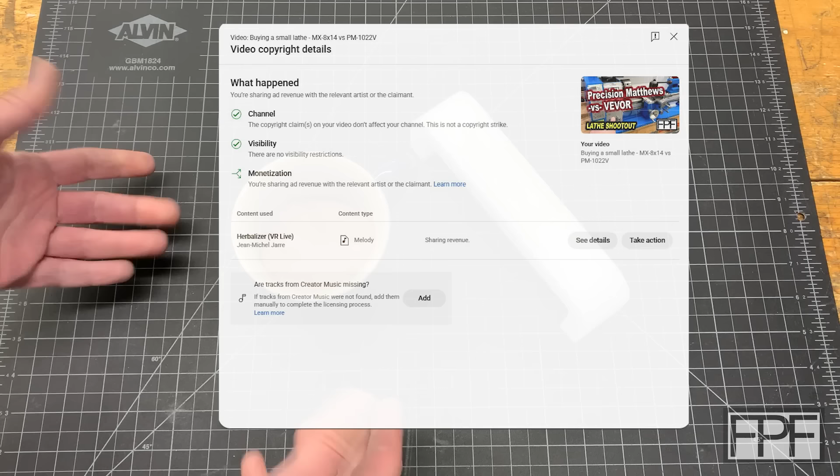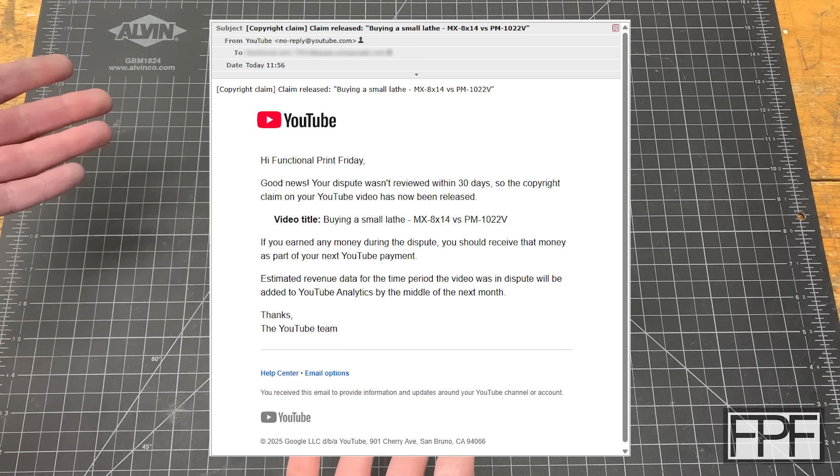But I do have an update. So just yesterday, which was actually the Thanksgiving holiday here in the United States, I got this email from YouTube that you guys have up on your screen right now, letting me know that BMG Music failed to review the dispute that I made against their copyright claim within the required 30 days. And this is great news. We have won this round.

I say this round because BMG Music could just choose to reopen the claim. Unfortunately, I don't believe there's any limit on the number of times that they can just keep making the same copyright claim against a video. I don't think they'll do that.

My original theory was that once I disputed it, they would wait the full 30 days and then just deny my dispute. And the reason companies do that and why that's so common on YouTube is because it allows them to just capture 30 days worth of revenue for that video. All of the ads that play, they get the revenue on that instead of their revenue going to the creator. So it's pretty common practice on YouTube.

I'm hoping that since they didn't deny the dispute, that maybe it went into a queue for a human to review and the bot didn't have a high enough certainty to actually bother having someone review it. I don't really know, I'm guessing, but all I know is they've let the dispute on both of the videos that they claimed copyright on pass, which means I should be getting that revenue back, which is nice.

One of the videos that they claimed it on probably didn't make more than a few dollars, but the other one's actually the second most popular video on the channel, so it probably did make some revenue. And it'd be nice to actually get that. So I just wanted to give you guys an update on that. For now, at least, it is very good news.

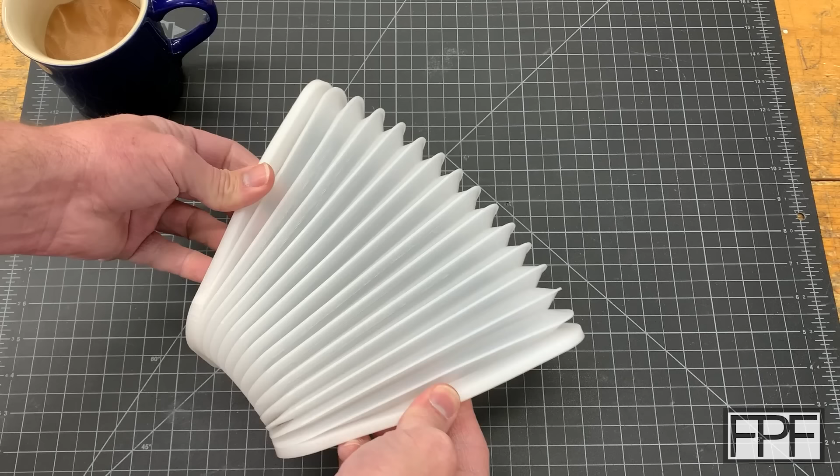All right, let's talk about what I want to actually work on this week. So here on the bench this is the test TPU bellows that we made here on the channel a while back. And I made this after coming up with the idea of printing a TPU bellows flat. And the way this is done is they're all removed now, but between each of the pleats here in the bellows on both this side and this side was just a thin piece of dissimilar material, either PLA or PETG, between the layers of TPU.

And so it prints flat, prints a little bit more expanded than this because you have those additional layers in there. And then once it's done printing, you can kind of pull this all apart, get all those layers out, and you're left with this really nice bellows structure.

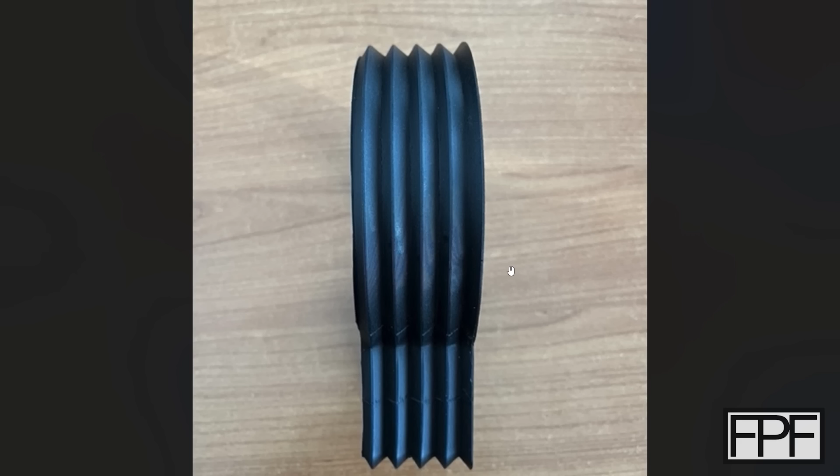I believe this is also printed in TPU, although I'm not sure. This was an attempt to make this sort of printed in its expanded state. The problem is, to print this, you end up with pretty wide layers of TPU, and this guy is just not going to compress very well. And I'm guessing, I didn't ask, but I don't think this compressed down to the 10 millimeters of total height that was required for this.

The good news is, like I said, I actually have the drawing that created this. And we do have a flat face, you can't quite see it in this picture, but I do have a flat face that we can essentially steal to start this design from. So let's head over into OnShape and I'll show you that.

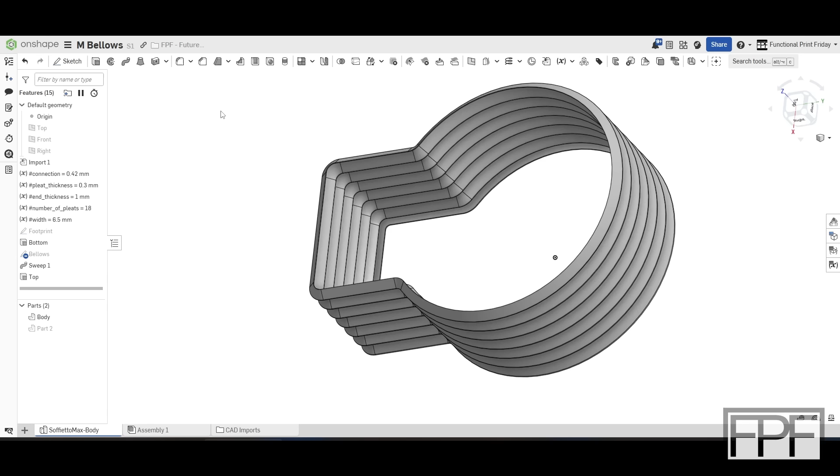All right, and here we are over in OnShape. And as I mentioned, a drawing was supplied for this, and that's actually what you're seeing on the screen since it was supplied in step format. So I started by just importing that step file into OnShape, and one end of this just sort of ends in a point. I don't know if this was the top or the bottom of the structure, but the other side has a nice flat face already.

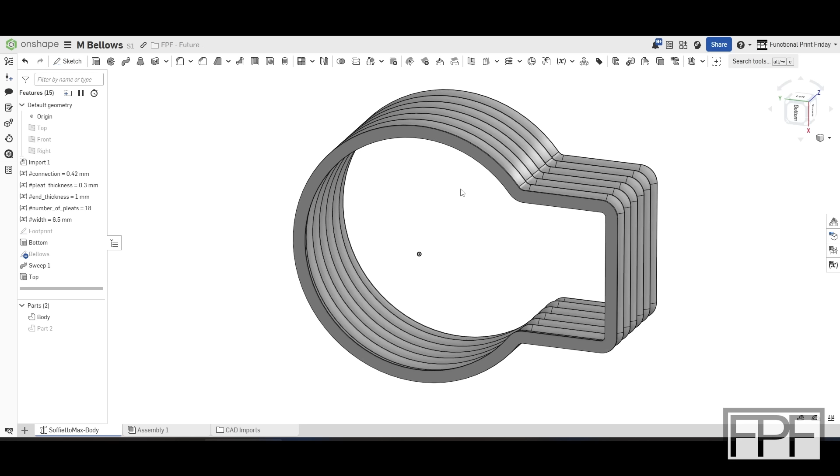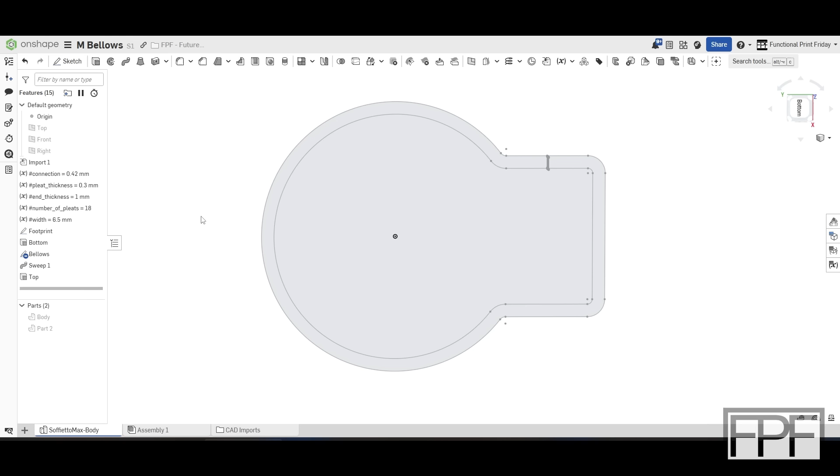So the first thing I did is actually just steal the geometry of that face to base this sketch on. So this is, I call this footprint. This is essentially the footprint, this face out here of the overall bellows structure. Next thing I did is design the bellows sketch, or the structure of the sketch itself.

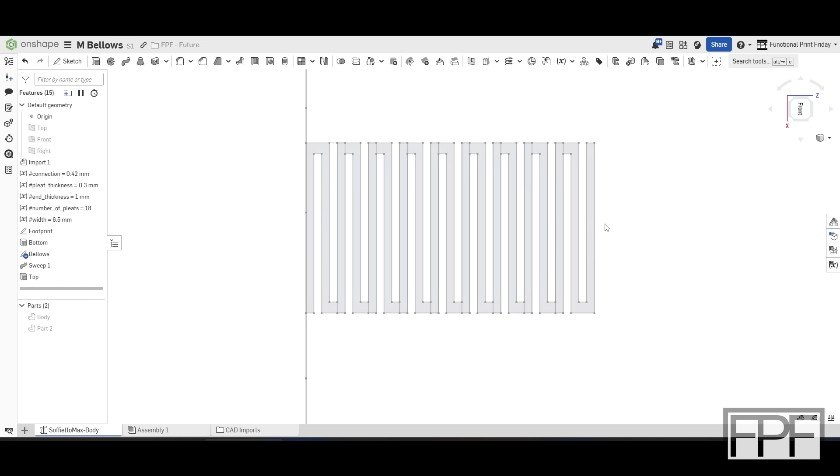There we go. So the gray section is the TPU, and the white sections between the gray sections will be our support material. So this guy is going to print as one solid stack, and then we'll expand it open and pull the support material out. So this guy is then able to open up as a normal bellows structure. And I can unhide my part here. All I did was just take that sketch and then wrap it around the other sketch of the footprint.

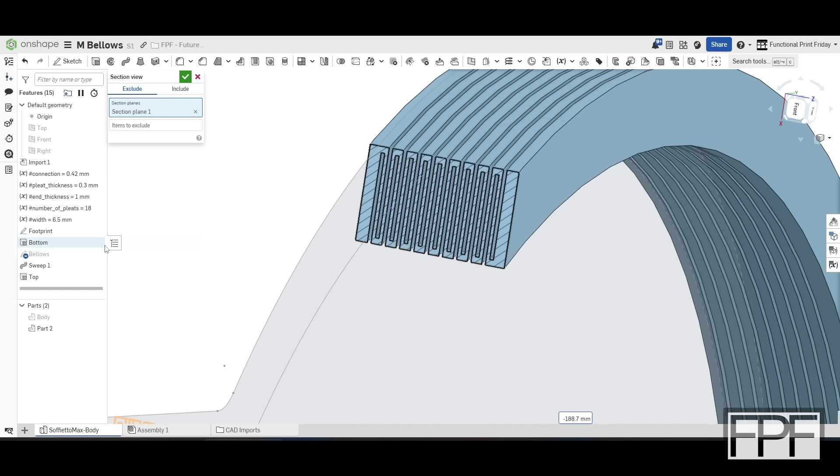And probably easier here if I just go into section view. See, we'll hide our sketch. So that makes it a little bit easier to see what is going on. It's surprisingly tricky to sketch. It's not that difficult of a geometry to look at it like this, expanded out, or in a section view like this, but it is actually a little bit tricky to sketch.

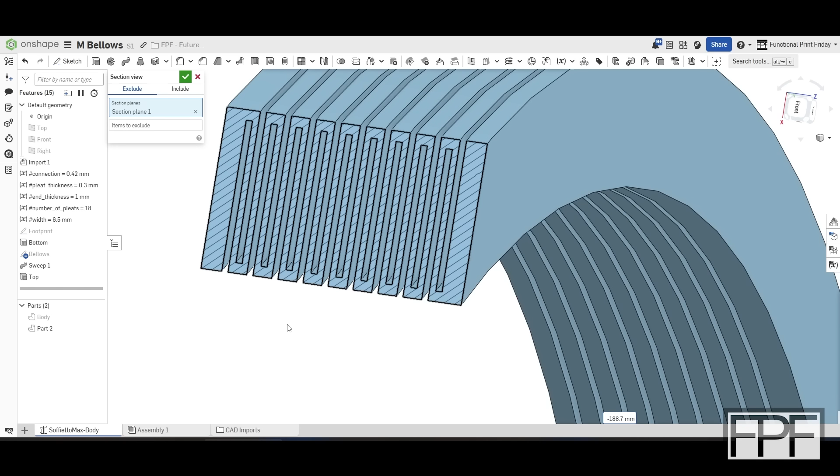And I did make it easier by putting in variables for like my pleat width, the width of the connections at the end, just to make it easier while sketching. And I have some ideas of how to potentially make this even easier as we make adjustments to this, but baby steps. I wanted to get this done, get this printing, and just see how it goes, because the width of these pleats is a lot narrower than the previous tests I've done with this method.

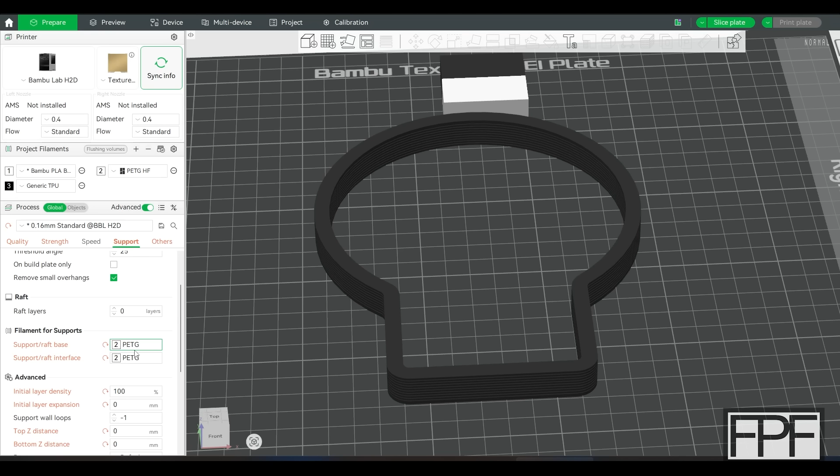So, all right, I'm gonna export this out as a step file, get this sliced up, and I'll bring you guys back. All right, we're over here in Bambu Studio. I've got this imported in, and I'm not going to spend a lot of time talking about the settings because I went into all this stuff in much more depth in the video where I originally came up with the idea for printing the bellows structure like this. But the key settings are to make sure that you have your style set to snug, and that you set both the support and the interface to whatever material is going to be your interface material.

Oftentimes you'll just set the interface to be the other material and leave your support material to be the same as whatever material you're printing from. In this case, you want to make sure that both your supports and the interface is the dissimilar material that is not going to stick to the TPU.

I used to set all these manually in here. The slicer has gotten much smarter. Since the original video I did, all you need to do is actually just make these two selections, and it'll ask you if you want to set all this stuff to the settings that are best for using a dissimilar material for supports. That all happens automatically now.

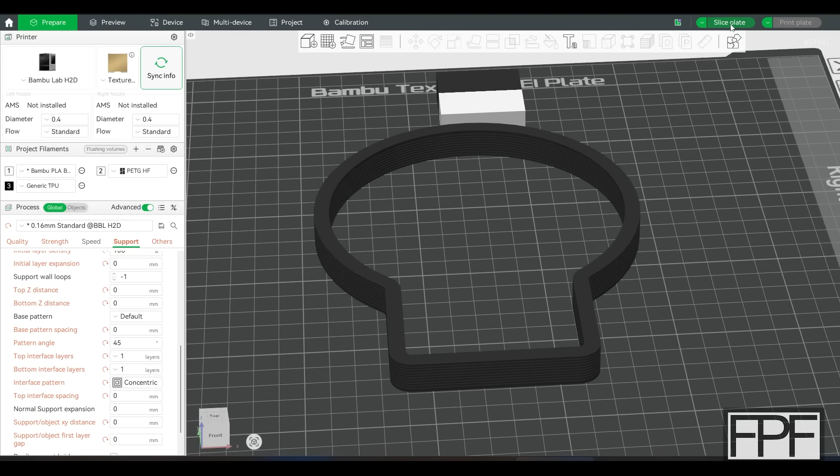The only other change I made in here was setting the interface pattern to concentric. And if I slice this up, you'll see why. On concentric, it's going to have one filament path or one line width path all the way around until it makes the full width. That's going to make this a lot easier to remove, hopefully, at least in comparison to hard corner edges.

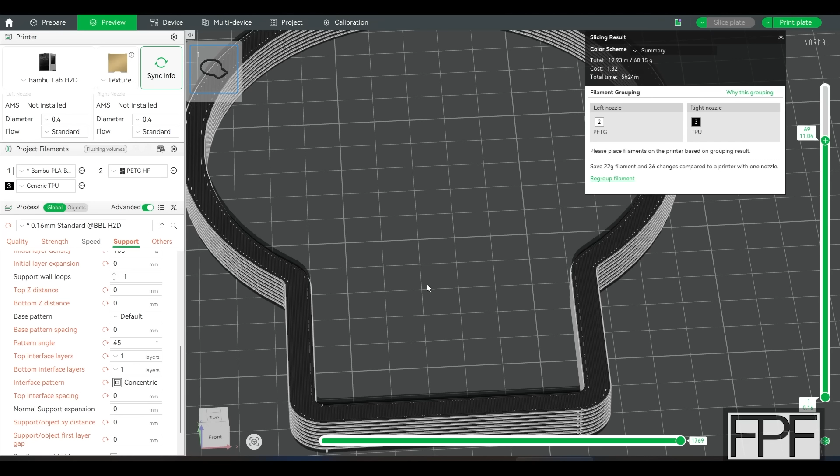Now, there's something a little bit weird going on in the slicer here. If you notice, I have the pattern set to concentric for the regular process as well. If we go over to strength: top surface pattern, bottom surface pattern, internal solid infill pattern. I have these all set to concentric, yet one of the layers, see this one here? That is not concentric. Now, if we go up another layer, it then layers a concentric path on top of that. So that's not actually what I wanted.

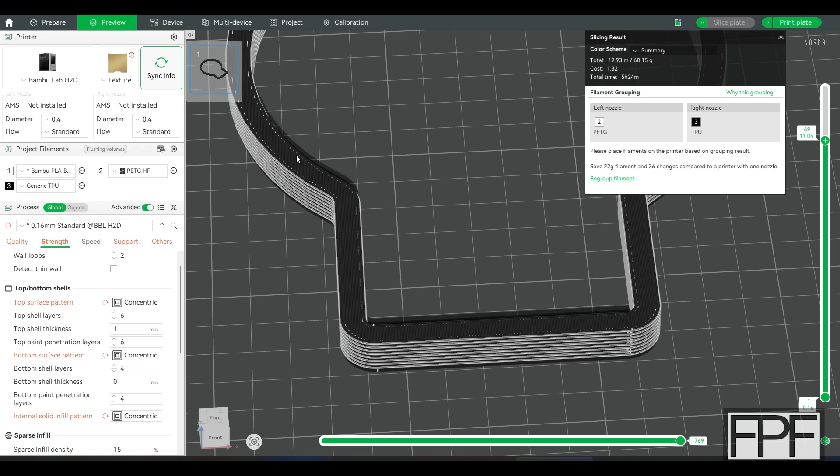But here's the thing. Since that's our TPU layer, I think we're actually going to get a lot more strength that way, assuming it doesn't have a hard time making all these short lines. Because if we did this as concentric, the second layer would stack directly on top of this. It should work fine, but it probably wouldn't be quite as strong. I guess we end up with the same exact path here, but for our section up here and down here, they're going to run the other way now. So that actually should give us more strength.

The supports, it does both layers as concentric. So I'm not sure why the difference there. If you know, let me know down in the comments, but I don't think that's going to interfere with actually being able to print this. So, all right, I'm going to slice this up. I'm going to print it. I'll bring you guys back.

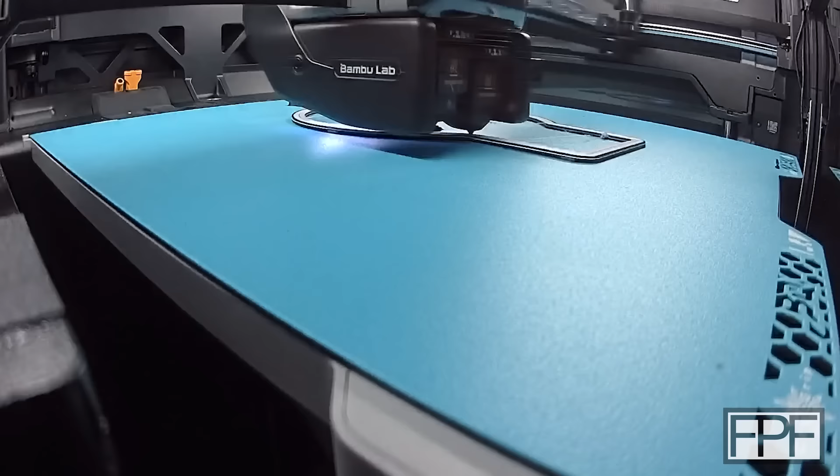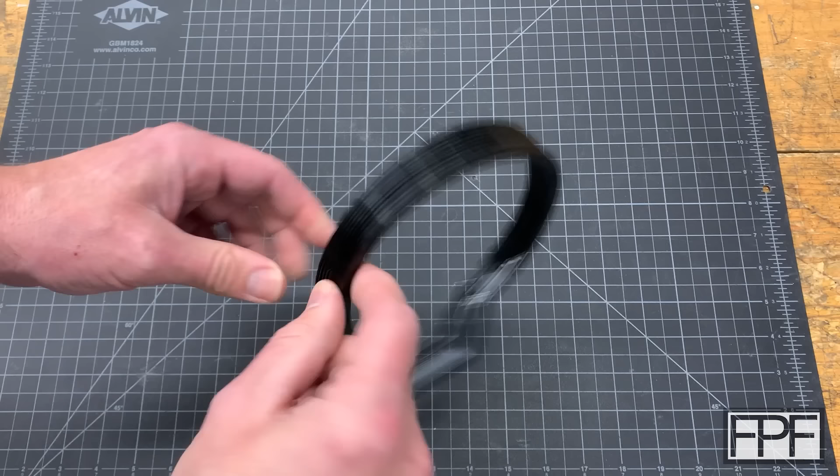All right, our first test print is complete. And I've been messing with this off camera for a while, trying to get these layers separated. They do take quite a while. I've got probably 20 minutes into this, just sitting at my desk. And unfortunately, I tore it at the back. I think if the whole thing was just circular, we might get away with just that single edge connection. I think we're going to have to go up to like 2 nozzle widths of connection, because as we get into these transitions, I think that's where it tore, right at the corner here.

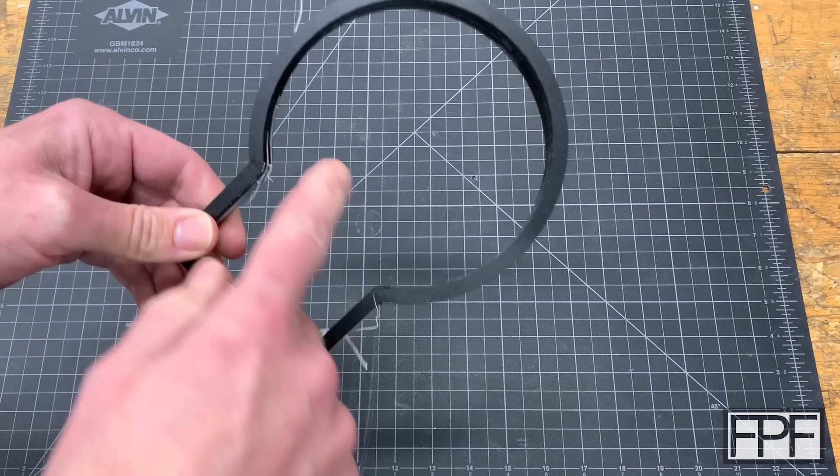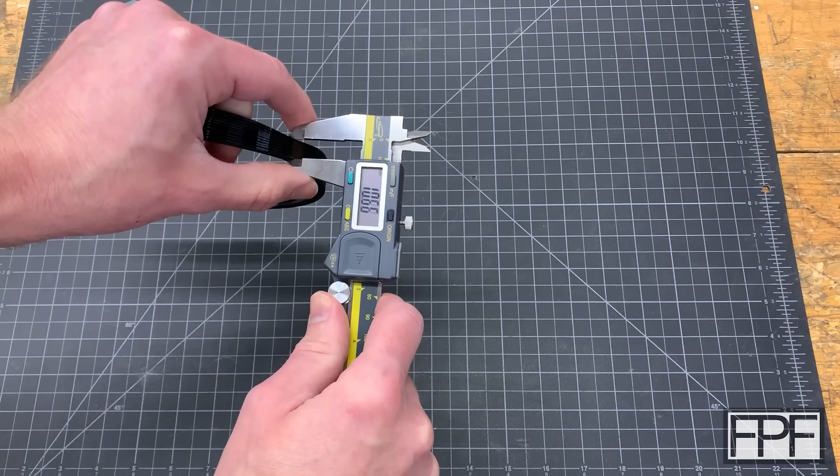Now, there was quite a bit of mess from the travel moves that crossed this, and it's possible that my TPU filament is not completely dry. I'm going to dry it again just to make sure. But I think this is still a good first test print. I think we learned a lot. Let's actually measure the width. Still over 10. I could push on this and get it down under 10, but the reality is that's over 10. So we've got a little bit of work to do there as well.

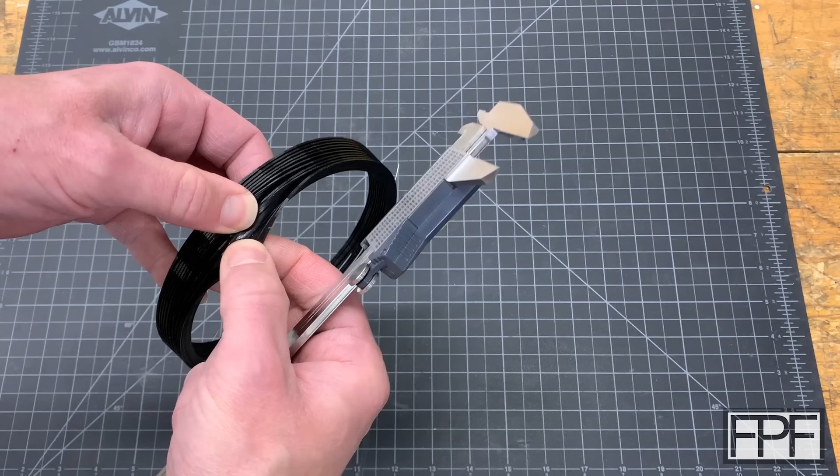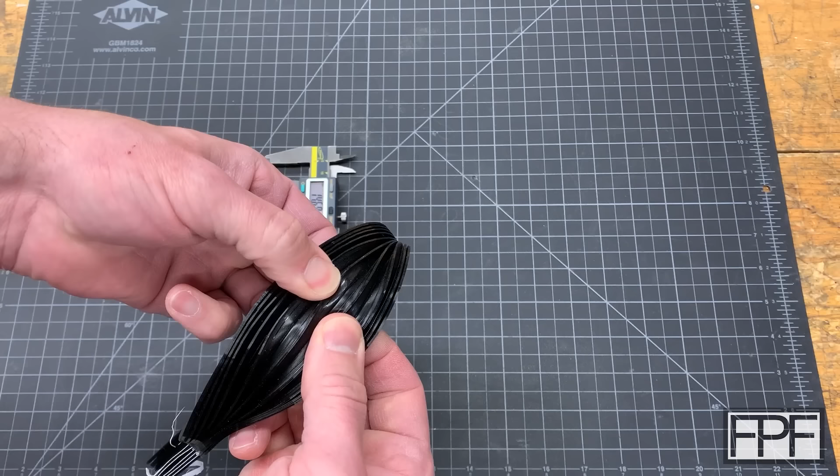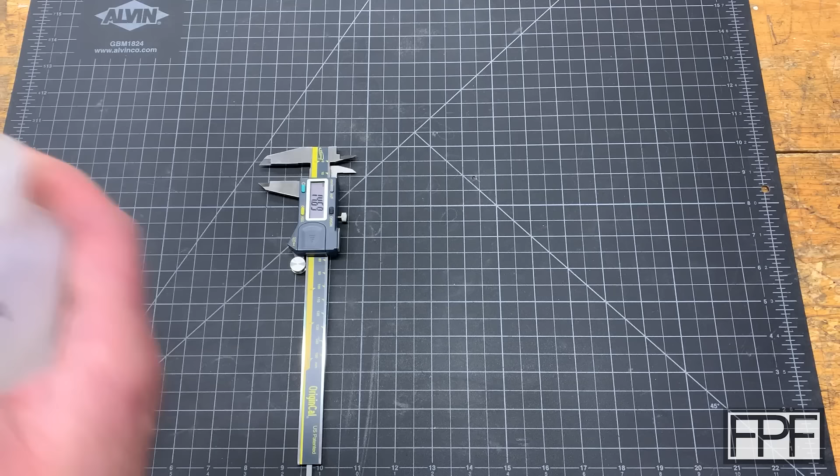I think we could probably reduce the thickness of the end pieces. But we're also going to lose a little bit in doubling the connection at the ends too, because if we think about each one of these pleats, the longer these are, the more this guy expands. So we're going to be reducing the length of each one by a little bit by doubling the width of the connection. Got to think about that. I also discovered, while trying to get this one to separate, I tried a little IPA thinking it might loosen these up, and it did seem to help.

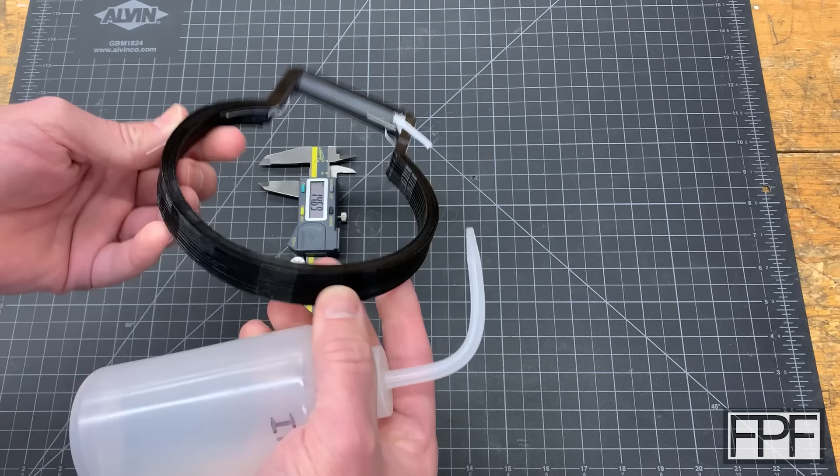So I probably made as much progress in the last 5 minutes as I did in the first 15 minutes once I started kind of squirting a little bit of IPA into the layers. So that might help us in the future.

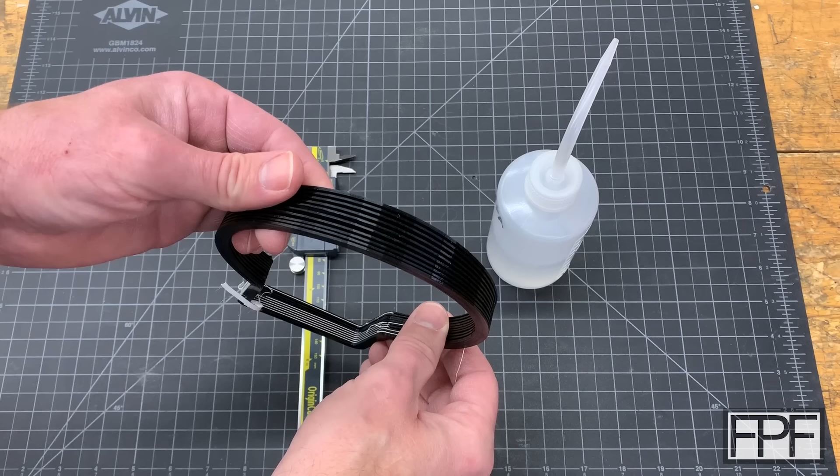The other thing I'm noticing here is, and I don't know if the camera's picking it up or not, but I can see facets all along the edge of this. Each facet is maybe about 10 millimeters or a little bit shorter in length. I can't remember if I exported this as a 3MF or a STEP. I'll have to check. We shouldn't be getting those. If I'm exporting this as a STEP and we're interpreting it in the slicer at a high enough resolution with arc fitting on, we shouldn't see any facets at all. That should look perfectly circular. So let's take a look at that as well.

All right, we got some work to do on this. I have an idea for the drawing that might make revisioning this a little bit easier. So let me go mess around with that a bit. I'll bring you guys back.

All right, we are back in Onshape, and I'm excited to share this with you guys because even though this probably looks like pretty much the same body structure of a Bellows that you guys saw in V1, the actual body of the Bellows is now built from a sweep of a completely different drawing. Rather than sketching manually the structure of the Bellows like I did originally, I've made that sketch fully parametric now, and this will automatically generate and regenerate based on that parametric sketch.

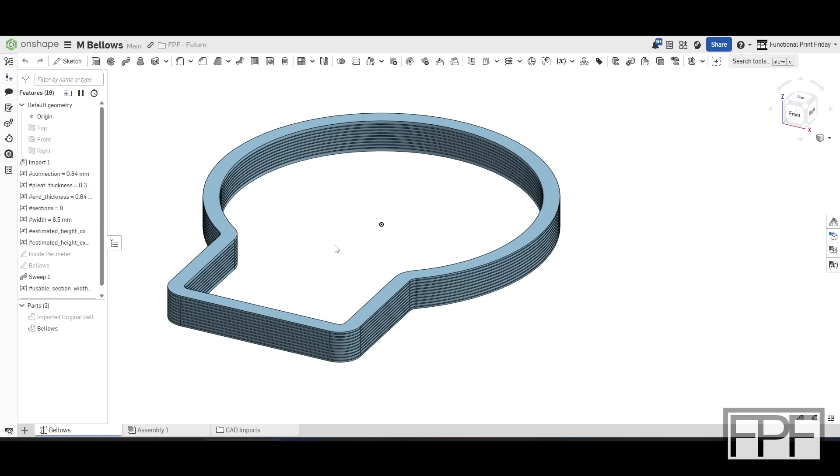So let's go into a section view. I'll show you what I mean. Let's grab one of these faces here, and we'll pull this back to where we have a nice view of the cross section of this guy. And I'm going to bring up my variables table, and we'll keep this in view so you can see what's going on. So the one change that we needed to make, and potentially the only change, was the actual connection at the end. That is the width of the point where the two pleats connect to each other.

And before it was 0.42. It was one line width with a 0.4 nozzle. So that's what our original one was based on. And you can see how thin that connection is. And I think it's probably enough if the support material between the pleats was easier to get out, but we really need the additional thickness there to make this guy hold together better. So I updated that connection to be 0.84, which is now 2 line widths. And you can see now that thickens up.

Now that also means that we lose a little bit of that width. And again, we don't have a lot of real estate for that width. That is our big constraint here, but we need that. We really need the 2 line widths to strengthen up that connection at the end. And I think my original Bellows test, same thing. That was done with 2 line widths for the connection point at the end.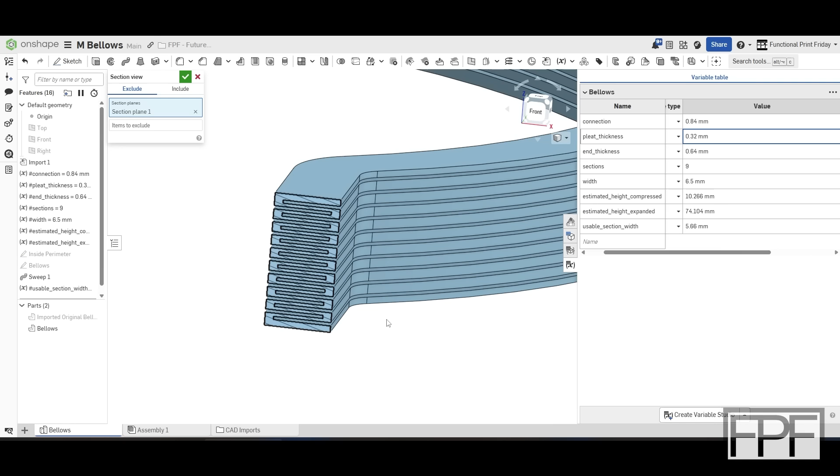Now notice I have over here in my variables table sections. Let me set this to 1. So this is essentially now the smallest that this can be. It's 2 end plates and 1 section. And the section is made up of 2 pleats. So you see it starts over here, runs this way, comes back, and then comes back to the same point.

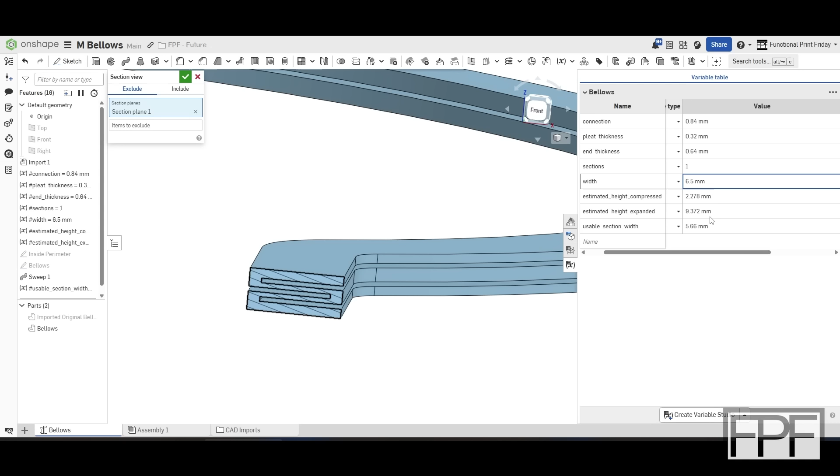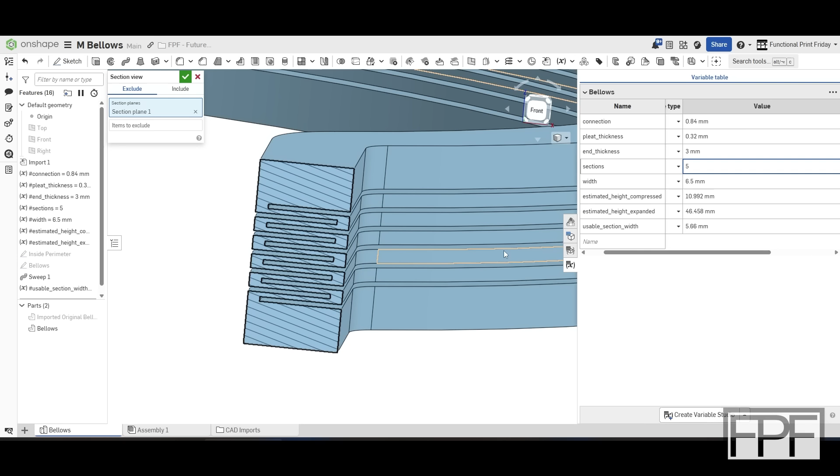By designing it that way, and I'm going to show you how I did that in the sketch, but just for the sake of seeing the cross section here, as I add additional sections, it just keeps multiplying that sketch of those sections and then throws on our end thickness to both sides. And to further differentiate the ends here from the center section, let's make the ends like 3. There we go. Now you can really see what's going on here. And if we go 10, 15, we can make this guy however many sections we want.

And if we want to change the size of the pleats, like right now they're 0.32, so this is going to be printed at 0.16 millimeter layer heights. So 0.32 is going to be 2 layers. So there'll be 2 layers of support material, 2 layers of TPU, alternating back and forth. Let's say we wanted these pleats to be a lot thicker, and we wanted these to be 1 millimeter.

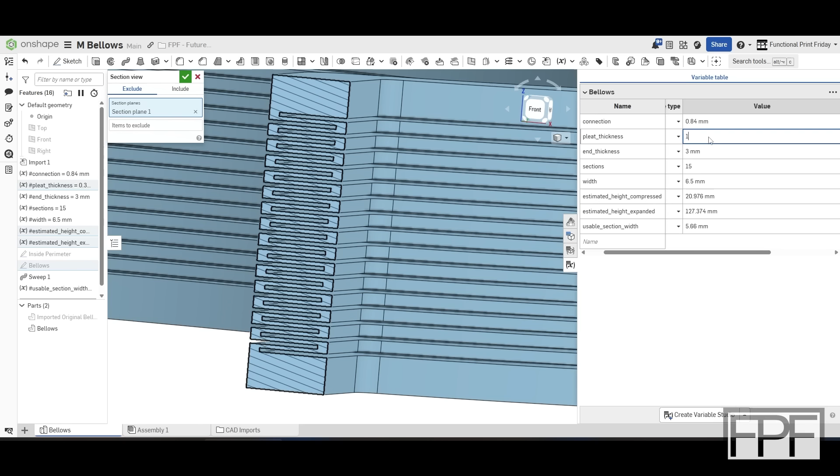There you go, everything just automatically regenerates. And for that sake, a regular bellows that we would design for something else, where we had a lot more width to work with.

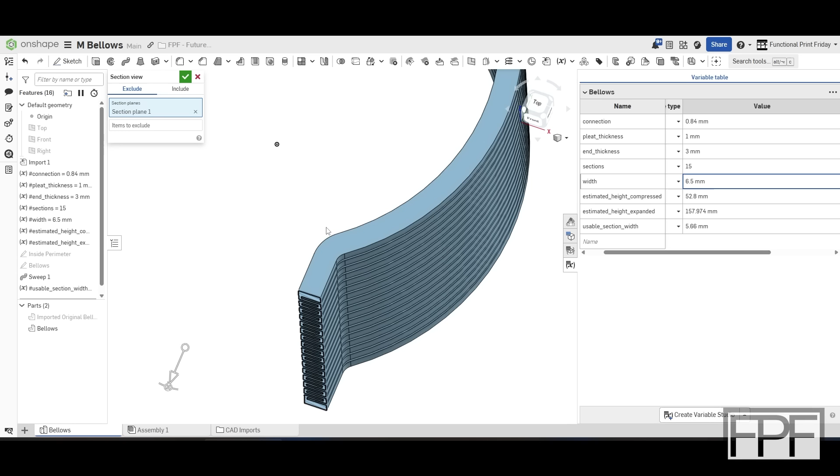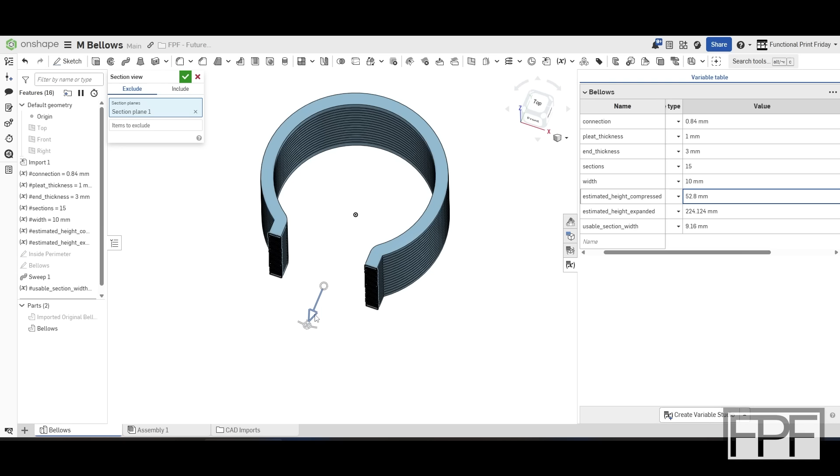Let's say we had more width—we probably can't go too high because the sweep still has to work on the tightest angles of the drawing we're sweeping around. So I don't actually know if we can go any bigger. Let's see... oh, okay, we got up to 10. At some point I think this is probably going to break. Yeah, can't go to 15. 12? Ooh, 10 might be the widest we can go. That's an artificial constraint based on our drawing, probably not these curves here—it's probably this tight curve down here on the bottom, if I had to guess.

But I can hear you down in the comments: how big can we make it? I don't know, let's try 100 sections.

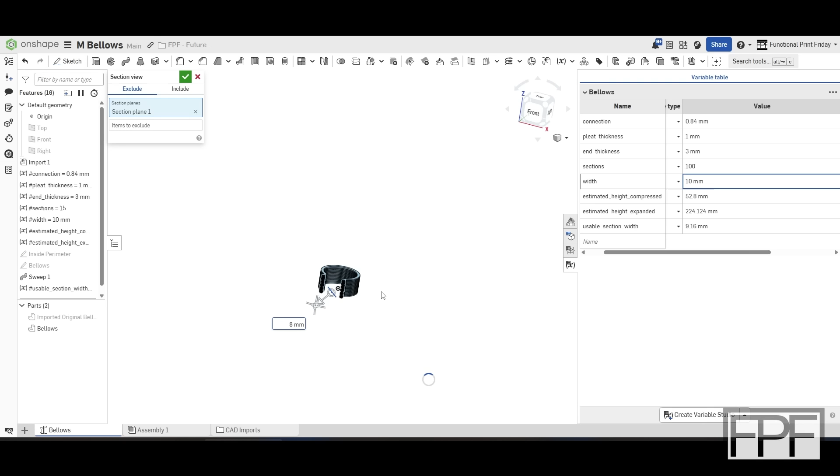Ooh, it's thinking. Still thinking, there's a lot of math to do. I know how I built the formulas in the drawing, and I don't think there's necessarily a simpler way to do it, but it is fairly complex—oh, there we go. It is fairly complex, the amount of math it has to do to generate this.

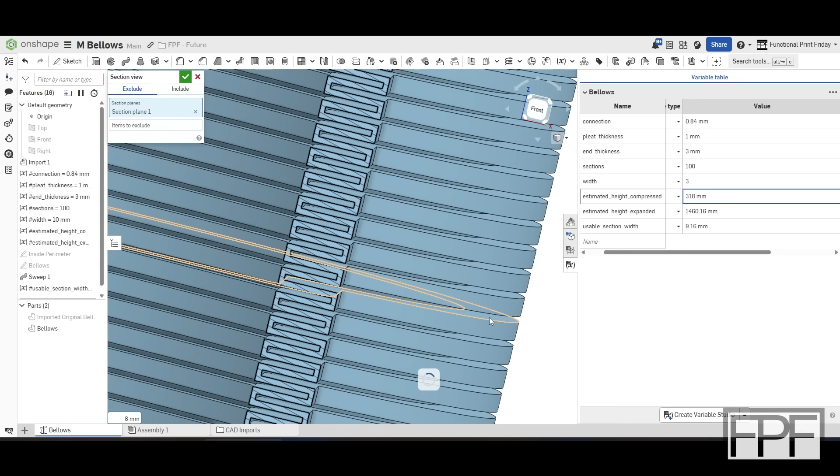But if we go all the way to the end, you can see it's still snapped on the end point in the right place. And we could go narrower with this too—you can see, as long as it works within the shape we're sweeping around, it should be able to edit this. And now we're still sitting at 100 sections, so yeah, it's got a lot of math to do, but there we go—it did it. It's just generating that whole body automatically based on whatever we're inputting here.

So how did I do this? All right, let's take a look at the sketch. I set us down to 4 sections here in the sketch, just to make everything sit a little bit easier on the screen.

And if I set this at 1, you can really see what's going on here. Again, we have our end connection, and then we have a single section in here, and you can really see how these mate together looking at it like this. So here's our origin point. We have a flat bottom on the section, and then it wraps around, comes back, and then has the riser that comes up that then mates against the next section.

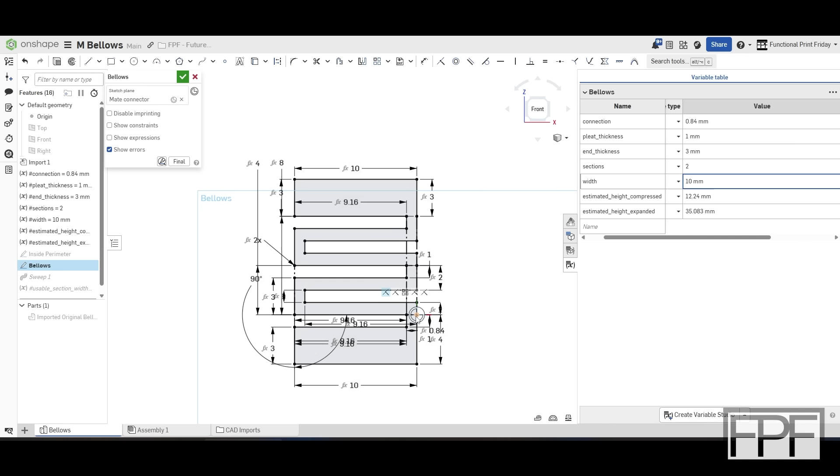So if we put this to 2, you can see those mate together nicely. And the distance of the end section, on the bottom, it's actually just away from our origin point, so really no extra math to do there—we just throw in the variable names.

But there's a construction line here that calculates the starting point of the end connection on this side. That's just taking all of the different thicknesses that are stacked up there and multiplying that by the number of sections. I think that is this one here—yeah, there we go, you can see pleat thickness times 4 times the number of sections.

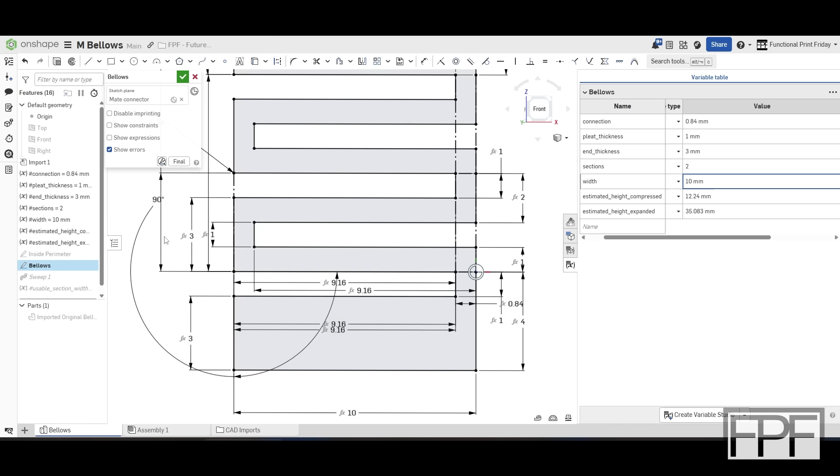Now, the way this is duplicating those sections is done with a linear pattern, and you can see the variables that make up the linear pattern in here as well. So this long arc here is the angle for the linear pattern. Let's just change this—I think that's probably the easiest way to explain it.

Let's make it like 30 degrees, and we'll go 3 sections. So that is the angle at which it's duplicating that linear pattern. And actually, by doing that, you can now clearly see the construction lines that set our distance for that end connection. So we'll set this back to 90.

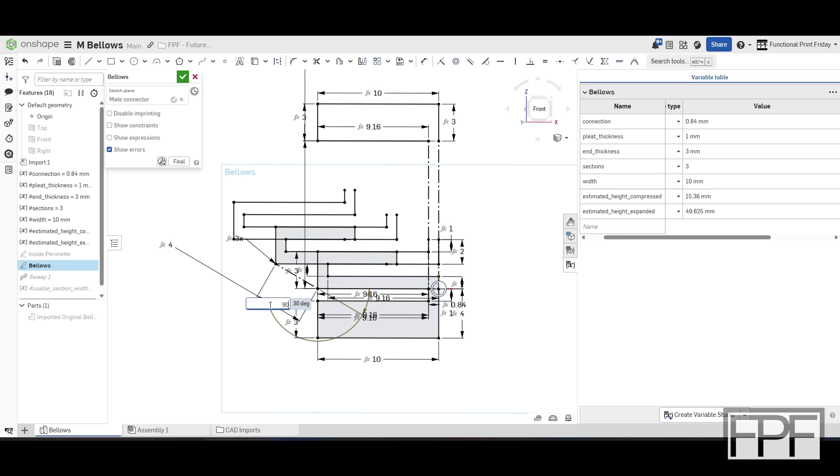And the other thing happening in here for that linear pattern is—where is it—there it is, number of sections. So that's saying 3x, that matches here. That is actually a variable in here.

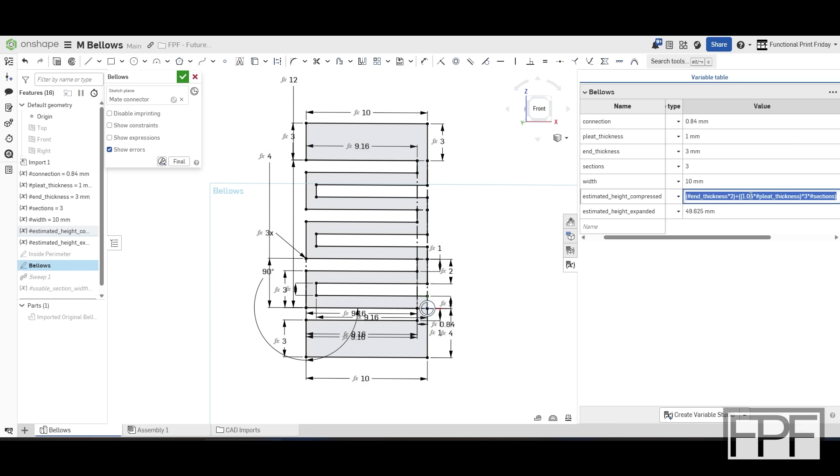If I expand that open, I've got 2 other variables over here that are calculated to help plan the size this bellows is going to end up being. So notice estimated height compressed and estimated height expanded—these are really just kind of rough guesses. You'll notice I'm assuming a 4% loss, or not really a 4% loss, but 4% extra stack-up for height compressed, because it's a little complicated to guess how much this is going to end up compressing down to.

It's not just the height of this printed out, because think about it, this is going to act as a hinge, this is going to act as a hinge, so that the tip of this can come down and sit against this, but that's not going to happen perfectly.

There's a little bit of texture on both sides, and that's what that 4% over here in this multiplier is doing. And then this just multiplies out by the number of sections.

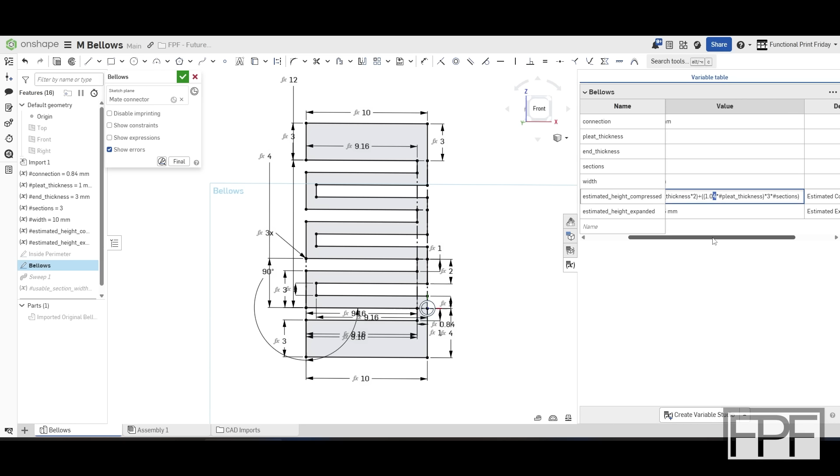So again, it's kind of a guess. I think we're at 9 sections with a pleat thickness of, I want to say 0.32, and our end thickness was like 0.65. Yeah, you can see now we're getting down close to 10 millimeters.

And this was sitting roughly at almost exactly 10 millimeters before I went and started tweaking these dimensions here while I'm explaining it to you guys.

We also get the estimated height expanded. That is just kind of taking a guess at how far this guy is going to stretch out. And the key thing to tweak in here is right here. So we're assuming that we're going to get 42% expansion on these sections, so we get 42% of the usable width of each one of the length of these pleats.

In a perfect world, it would stretch out to almost 100%. We're not going to get, it's not like these corners or these hinges are going to straighten out to be perfectly straight. But if we stretched on it hard enough, we could essentially make this, let's call it 0.99.

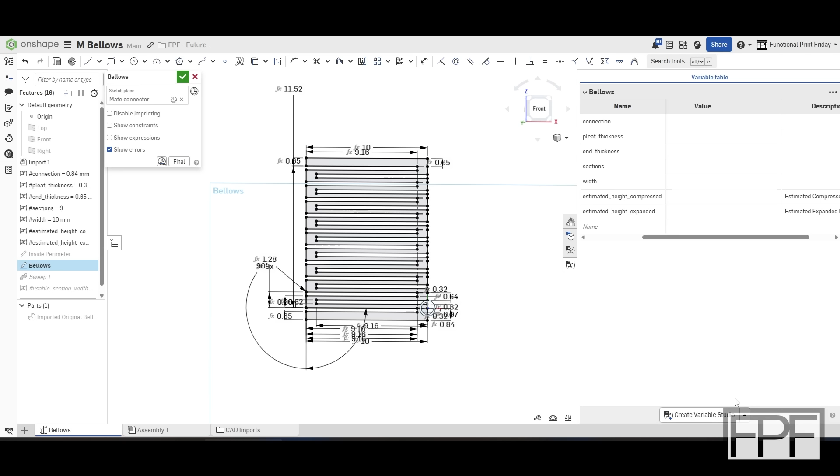Just edit the formula in there. You can see this guy would expand out to, again, in a perfect world, 255 millimeters almost.

So I know there's a lot going on in here. Hopefully this makes sense to you guys. I'm really curious to hear down in the comments if you would have done this in any different way.

I could think of a couple other different ways to do it, including a pattern of the body geometry that we create as well. But what I couldn't wrap my head around, if I did it that way, was how I would position the ends.

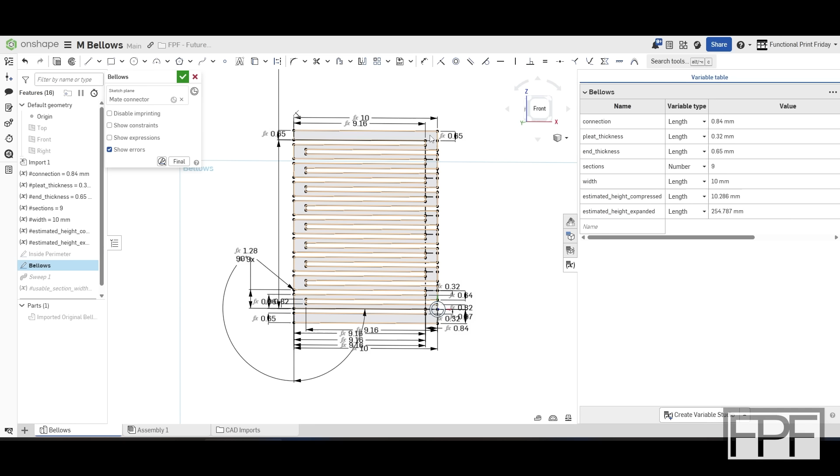By doing the linear pattern in the sketch, I can still make sure that the ends, which are a different thickness, land in exactly the right place, regardless of how many sections or other tweaks I make to the math here for the bellows. All right, enough talking about this.

Let's get this all sliced up, printed out, and see how we did.

So I'd like to start a new tradition here on the channel this time of year. I've noticed when we get to about this time of year, about a month from Christmas, that a lot of channels will share gift ideas, things that are on sale, stuff like that. And I'm not really into doing stuff like that, but I do like my toys, tools.

And I thought, well, what if I went back through my Amazon shopping history for the course of the last year, so stuff that has to be in 2025, and shared with you guys the things that I've picked up new in 2025 that I think are absolutely awesome, that I would immediately just purchase again if they went missing.

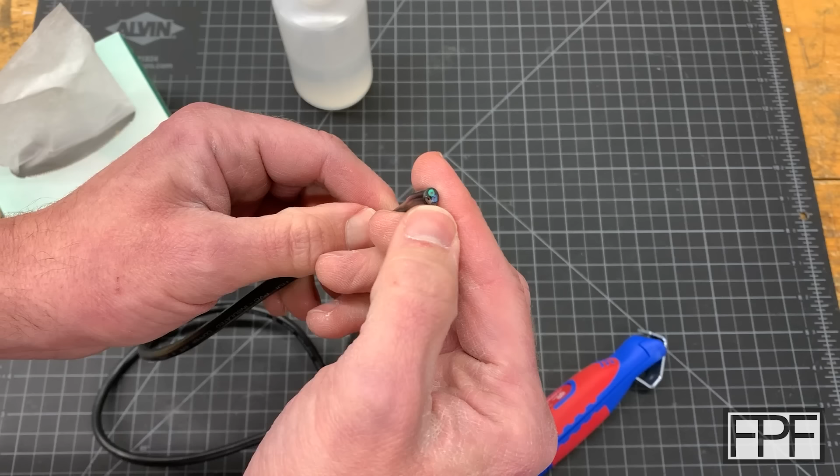Well, historically, I have always taken a razor knife and either tried to slit this down the length without going too deep and hitting those wires, or taking a set of cutters and just nipping in at the end and trying to cut that jacket all the way back a little bit at a time for as far back as I want to go, and then trim it back at depth.

Well, recently I discovered these guys, and this particular one is made by Weicon Tools out of Germany. This part here is spring-loaded, and that's like a little knife there that rotates around, and you can adjust how far that sticks out with this little red wheel back here. And now if I want to take off just this outer jacket, all I got to do is push this with my thumb, let it spring back, and then I just rotate it on our wire.

And after running it around a few times, oh, it could go in the wrong direction. Let's try that again. Yeah, it feels like it's doing something. There we go. Look at that. And there's still a little bit to break through.

I've noticed if you set it far enough where it completely cuts this, because think about it, the 3 wires in there, it sort of forms a triangle. So you still have points where these wires stick out closer to the edge there. If you set it to go deep, actually that's an even better way to see what's going on in there. So if you set it to the depth where it's going to cut all the way through, you're probably going to nick the wires, but you only need to really just score it.

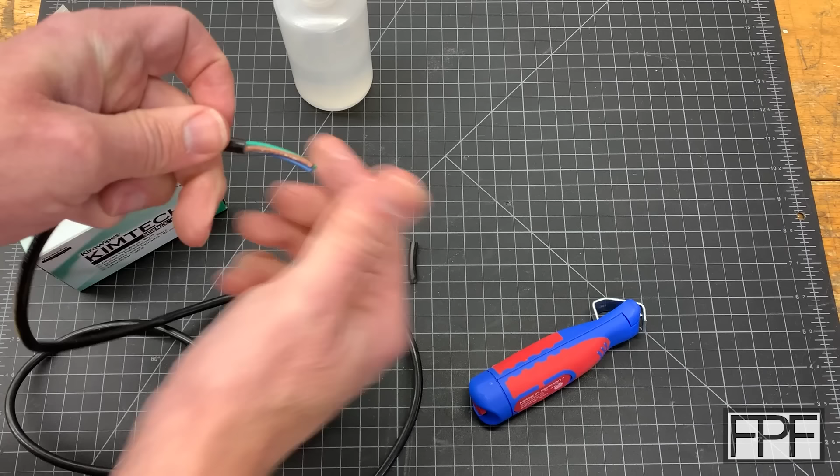Let's do it again. Am I going the wrong way again? We'll just go both ways. So if you look at that, now if I just give this a little bit of a bend, where it wasn't quite cut all the way through, it's scored enough, I can just bend this guy back and forth and slide that right off, and you have a nice clean cut there. If you're doing a bunch of wiring with this multi-conductor cable, this makes it so much faster.

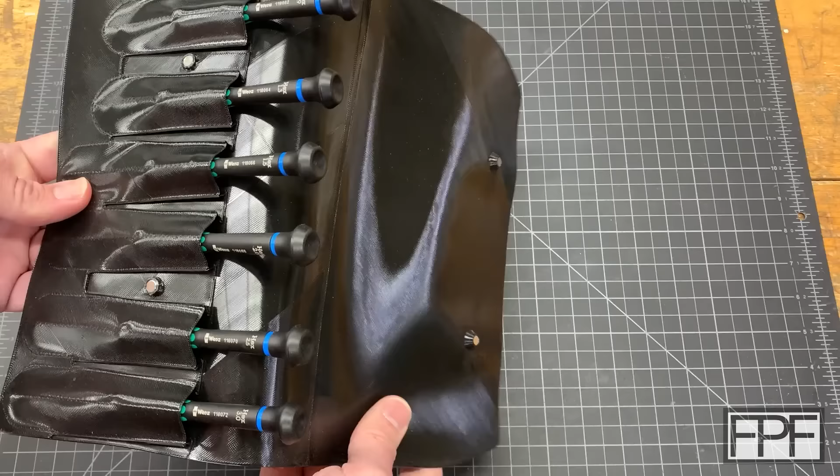All right, this next one is the set of hex drivers that I picked up and then made this TPU case for. These hex drivers are awesome. I find myself pretty much using these every time this range covers the size that I need. This particular set goes from 0.7 up to 3, which is, just to give you an idea there, 0.7 is really, really tiny. Unless you're watching this on like a 100-inch screen, you probably can't even see the actual hex shape at the end of that. And then 3 is still decent size.

I mean, this covers pretty much all the fasteners that you typically have on a 3D printer or other small electronics. But the Wera ones are really, really nice. The end pivots, so that rotates, and then this funky looking shape here is actually meant to be grabbed between your thumb and forefinger. And then this seats back against your palm and it pivots, so you can push and twist at the same time. They're really, really nice.

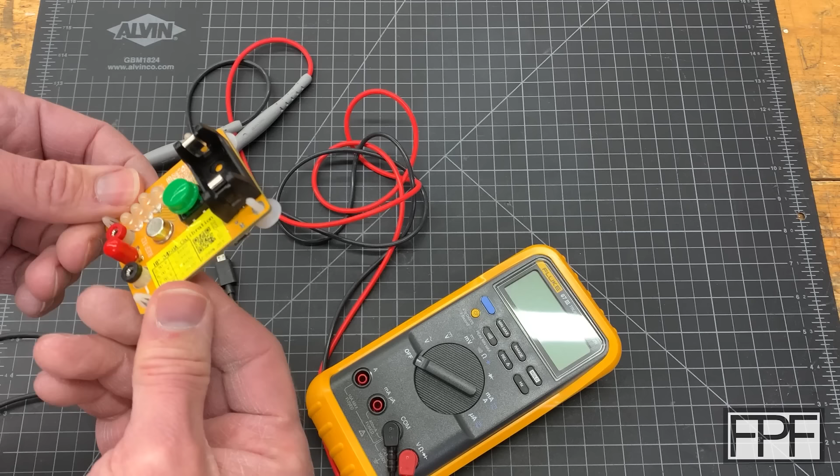All right, next thing is this little guy right here. This is a calibration board for multimeters. Over the years, I've collected many different multimeters, and how do you know they're accurate? This is actually one I just purchased used this year off of Facebook Marketplace, and I compared it to some of my other meters, but how do I know they're accurate? And you could send these out to have them calibrated, but it's expensive, a decent amount of coin, and you're paying shipping both ways.

This calibration board was, I think, less than 20 bucks. And yeah, I'm trusting that it's accurate, but it looks like this was calibrated with an HP 3458A, and they show the exact values that they recorded for the different ranges. So the way this works, oh, and if you buy this, this is all you get. It's just this board. You've either got to get one of whatever batteries fits there, or it's got a USB power connector down here, so add a cable and an extra brick. I just power it that way.

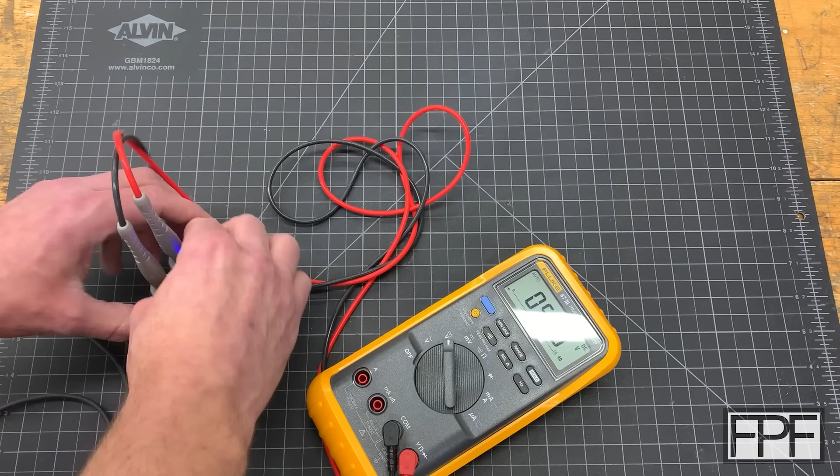And it doesn't do anything at first other than just light up, but if you push the green button, it will switch into one of the ranges. And if I put it into the multi-tester here, I just put the leads in here. Now it's outputting 5 volts, or actually it's outputting exactly 5.00133 volts. So we're pretty darn close here. It's slightly off. That should actually be 5. No, actually that would be right because it's rounding. So yeah, that's correct.

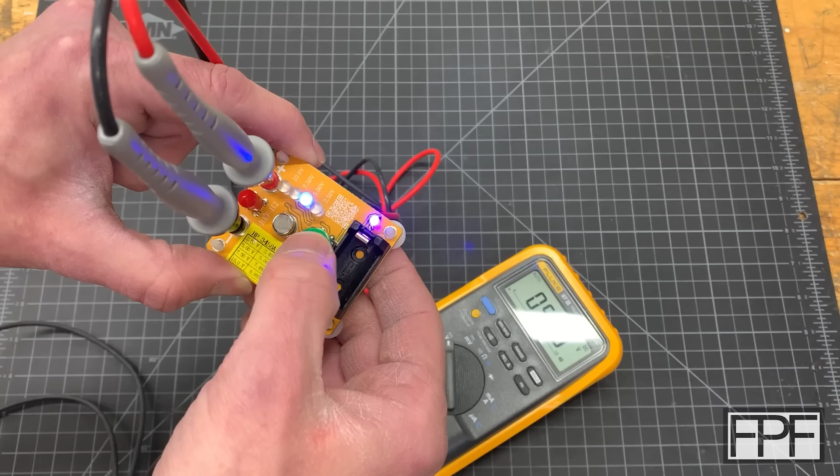So 7.5 is actually 7.49156. Yep, we're right on there. You guys get the idea. I'm not going to click through each one of these, but if you've got a pile of multimeters in your collection and you want to know if they're actually right, or you want to calibrate them yourselves, this is awesome.

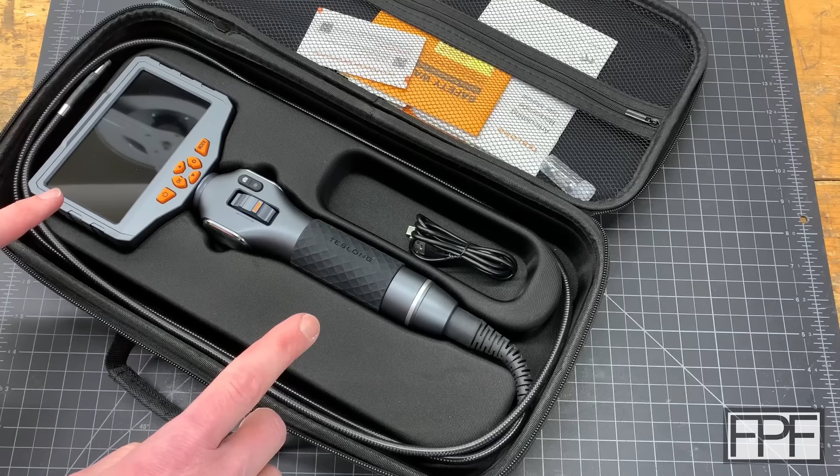All right, this next one is probably my favorite new toy of 2025. Did I say toy? I meant tool, of course. And I've used this a couple times on the channel, so many of you guys have seen this before. But this is a borescope. And I owned several borescopes before this one, and they were always the cheap variety, like the Wi-Fi ones that you connect to an app on your phone. And they're just about worthless. I guess it's better than nothing, but the video feed is always washed out. Nothing's ever in focus. This one has a nice high-def screen on it that's built right in.

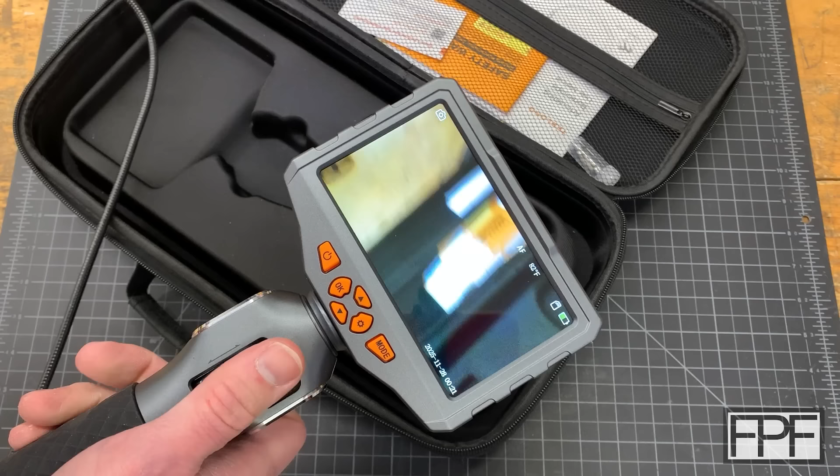But check this out. I think it's long press on that to boot. Yep. So this actually has autofocus. So whether you're right up on something or far away, you notice it's blurry for a second and then it autofocuses and adjusts. Everything is always in focus regardless of the distance. And the other trick that this one has up its sleeve is, like I said, you can actually control the end with this wheel here.

So say you're in a pipe or something and what you want to look at is not where the camera is pointing. You can actually control the end of it with this wheel here and get around and look around corners, stuff like that. It's awesome. Again, I guess it's kind of a toy as much as it is a tool, but definitely one of my favorite new things for 2025.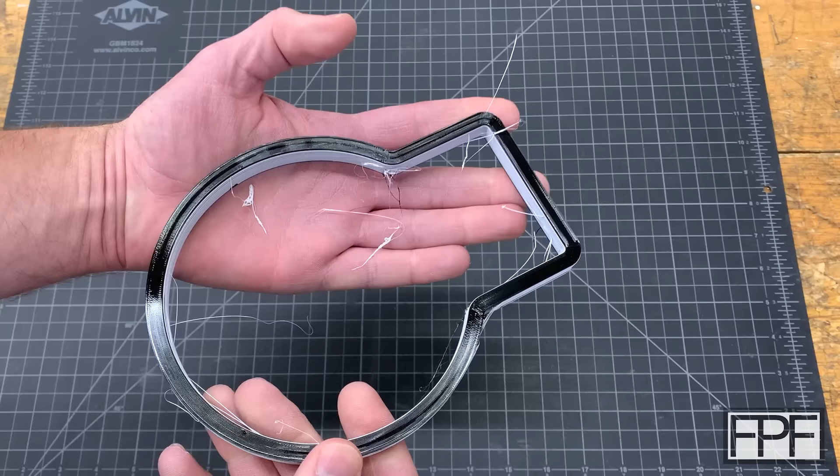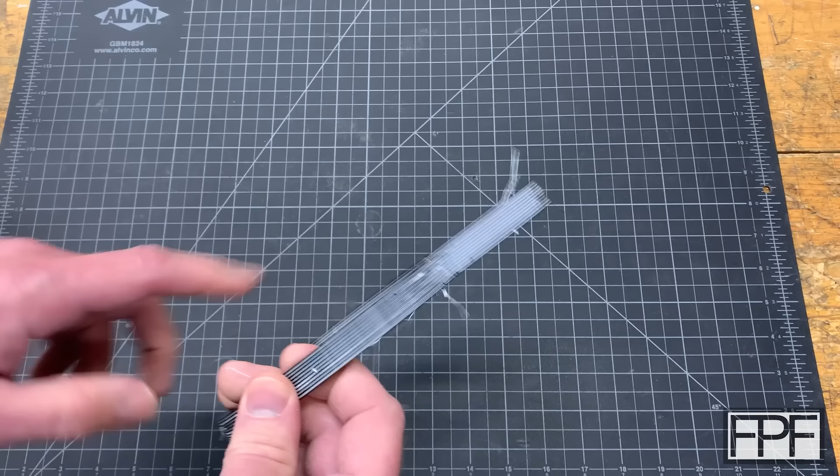All right, and our next test print is done and came out much cleaner than the first one. I have not done any cleanup on this at all. This is exactly how it came off the bed. This is probably about 1/3 the amount of stringy bits that are hanging on versus the first one. Now, I mentioned when I took that first one apart, I used some IPA in a squirt bottle just to saturate some of these layers, and it did help separate it a bit.

So I'm wondering, what if we just put this guy in a Ziploc bag with some alcohol? I suppose we run the risk of it potentially compromising some of the bonds of the TPU as well until it dries, but I want to try it. Worst case scenario, we can reprint this, but on the upside, this might make this guy more or less just fall apart. So let's try it.

This is going to take quite a bit of IPA, but if it works, we should be able to reuse it. Pretty sure what these bags are made of is not going to get eaten up by the IPA. Guess it's going to be a pretty big mess here on the bench if I'm wrong about that. I think it's leaking a little bit there at the edge. All right, well, I think that's sealed up well enough. I'm going to give this about 5 minutes. I'll bring you guys back.

All right, it's been a little over 5 minutes. I'm probably going to regret doing this. I think this IPA is probably going to really dry my hands out now that this guy is soaked. But if I put gloves on, I don't think I'm going to be able to get a good grip on it. So let's try this. Boy, that still feels really stuck together. I wonder if leaving it in there longer would be beneficial. I was kind of hoping this was going to separate a lot easier.

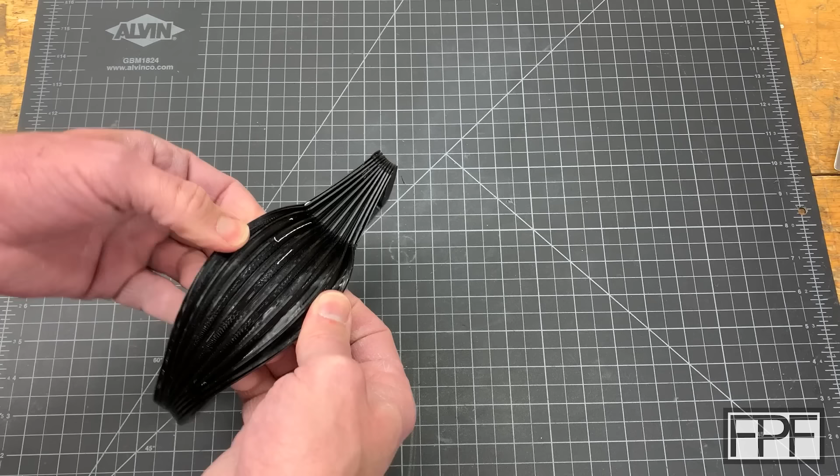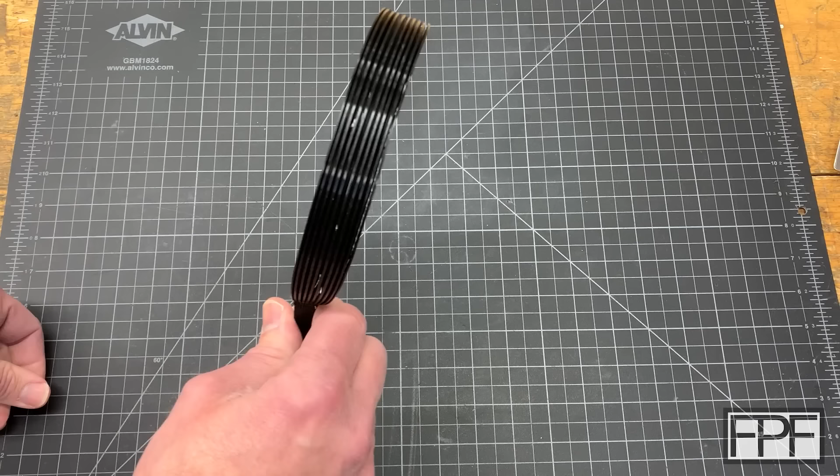All right, guys, it's actually the next day. I spent quite a while with this guy after turning the camera off last night before calling it quits. And you can see I've still got little pieces of PETG in various places on here. And I tore this somewhere, I think in one of these corners. This is the one that we had 2 line widths of connections between the pleats, and I kind of made the assumption that it was probably indestructible, given those 2 line widths. Well, it wasn't. If you pull hard enough, it'll still tear. I think it's torn on like the last pleat in one of these corners. Can't remember exactly where.

I stopped messing with it because I remembered when we did the test of this, way back when I came up with this process, that different brands of TPU seem to like different release materials better. So this one was done with PETG. I thought, you know what? Let's try one with PLA instead. See if that makes a difference.

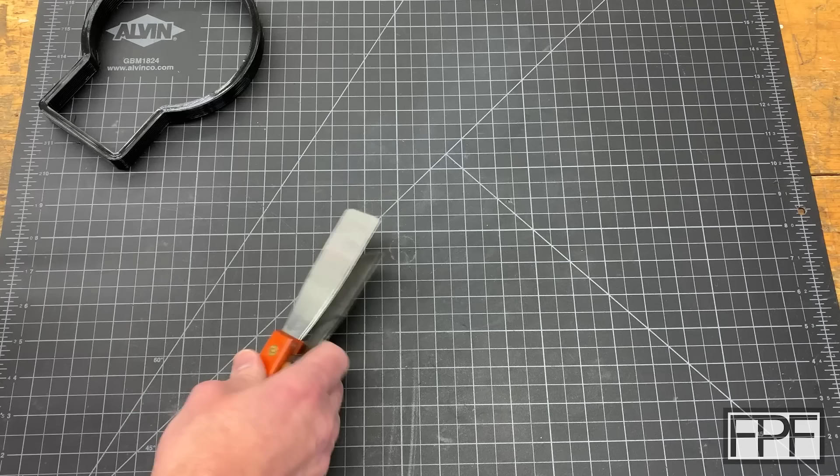All right, it finished. And you can see it doesn't look very good here, but this is actually pretty normal. This is the same amount of stringing that I had on the other ones as well. I think it's not retracting this material because it's support material, but it didn't seem to interfere with the last ones. So I also brought up my better scraper. This is the best one that I found that's still sold new today, and it does feel very similar, but this antique one that I have still seems a little bit thinner at the end. It's better at getting into these.

So I'm gonna get the camera off over to the side. Well, actually, let's just try and see if I can separate this at all first. Ooh, maybe. I could feel that starting to give a little bit. Let me get you guys over here out of the way.

All right, well, that time lapse that you guys just saw was 34 minutes long. That is how long it took me to post-process this guy. These are really difficult to do because the width of the pleats is so narrow. The larger one, the test one that I did, let me grab that. Yeah, this one was a lot easier because the pleats are really wide. So you can kind of flex it and bend it, and you have a lot more leverage to pop those guys out. Because the pleats are so narrow on this one, really quite a bit of work to get them out of there.

Now, through the magic of YouTube, it is actually the next day, and I have finished another one. And this one took me a little bit less, probably 20, 25 minutes. And this one also came out perfect as well. So 2 of these were requested. 2 of them are done. I guess let's double check the dimensions. This should compress down to 10, but let's just check it.

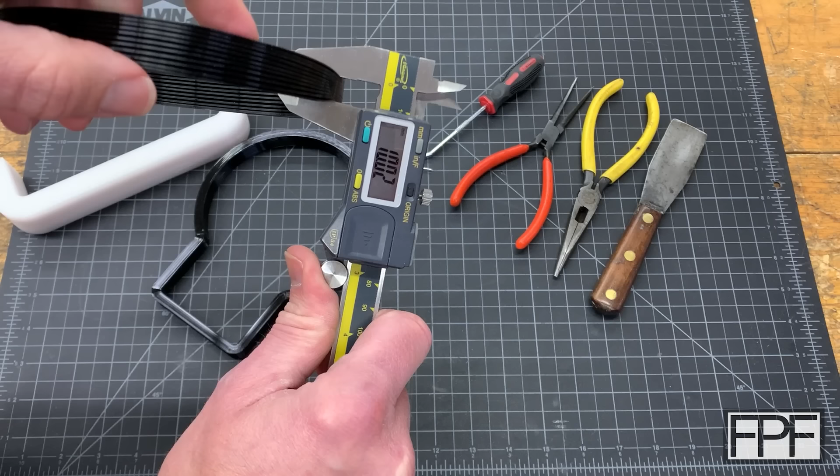Yeah, wow, that guy is like right there, right at 10.02. I could probably squeeze it and go, yeah, I mean, if I squeeze it, I can go less, but where I would comfortably take a measure with the calipers, it's basically right at 10. And this needs to open to 50, so let's set these at 50. I'm quite sure it's gonna open further than that.

Make sure I'm grabbing in the right spot here. I don't wanna miss any pleats. Oh yeah, I mean, we could probably get almost double that, but that's okay because to 50 requires very little effort. We're not stretching these out that far. So yeah, that'll work. Well guys, that ended up being a lot harder than I thought it was gonna be. Again, mostly down to just how narrow these pleats are, but lesson learned.

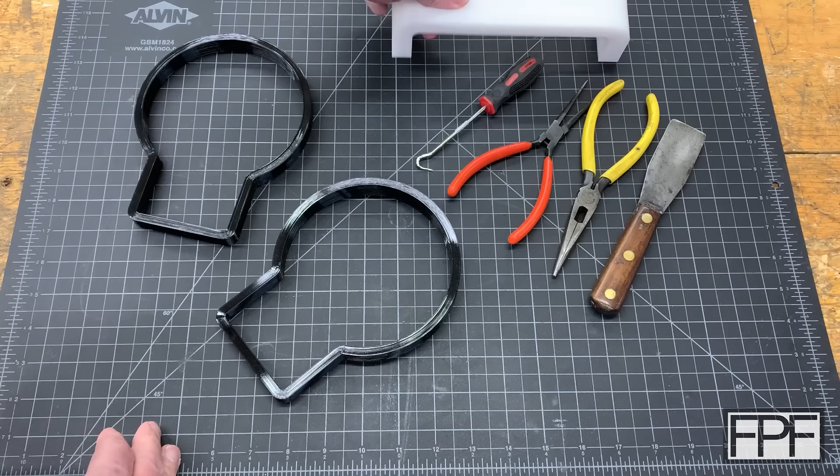And at least all that sketch work that I did for this, including all those formulas and the variable table, can now be reused. I mean, I drew this originally in SketchUp. This was done in OnShape. I can essentially just take that, even though these are so different, the exact same sketch would reproduce this.

And the point is, I can essentially draw the outline of whatever I want and then take that sketch and essentially apply it to pretty much any shape and adjust the width, the connection at the end, thickness of the end plates, everything. In fact, I could probably even do some additional customization for the end plates to maybe even include like a pattern of screw holes or all sorts of stuff. So we'll probably see that again in a future video.